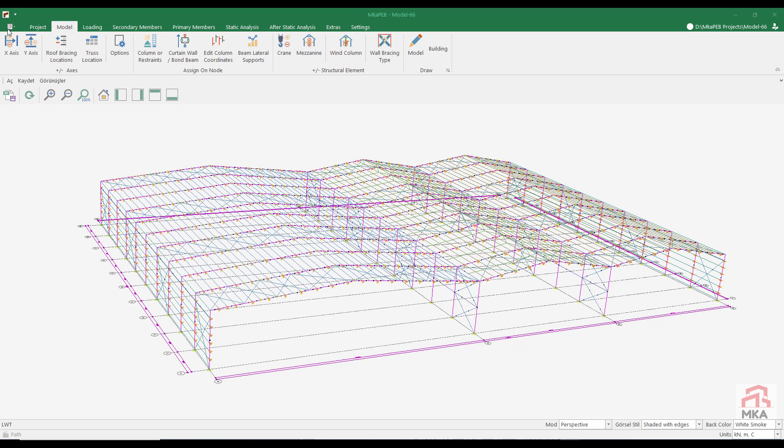So, which standard will we use when solving this project? They said we can use Turkish standards. But this place is actually in Iraq. So we have to use American standards. I will use Saudi Arabian standards in this project because it is the closest place to Iraq. They are neighbors and I will use it to get their earthquake parameters. If you want, let's start the project like this.

We are opening a new project. This will be a PEB type structure, it was intended to be so. Let's keep our truss length of 50 meters, column lengths of 9.5 meters, and 6 meters between axles. Let's remove the column first. Let's fix the features of our truss, 50 meters. I chose this place as 2.5 meters, we were free about it.

I want the distance between the purlins to be around 1.5 meters, so I divided it into 18. With 1.40 intervals. DCY, the initial height of the beam, 1 meter. We make the width of the DCX column in the corner 1.2 meters. DRY is height at ridge, 1 meter.

In the DCX corner, the part where the tapered section will continue along the purlin is exactly 6. I have selected 7 from the DRY corner, and how many purlins from the NDRX ridge will be variable. This is how we arranged our first roof system. I added another one of the same.

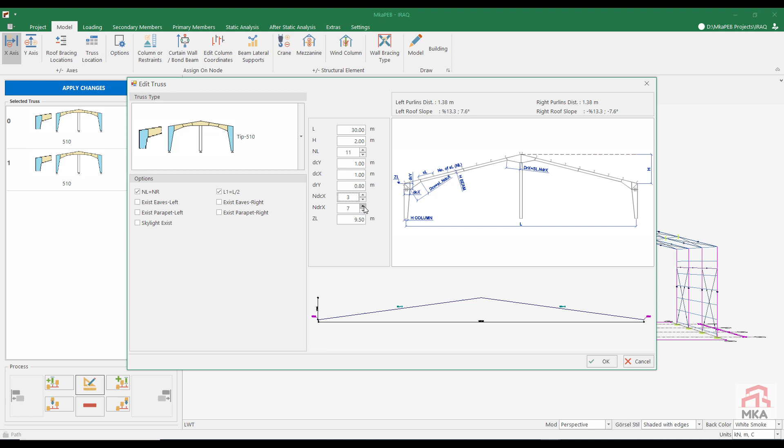Let's edit it now. This time, the span length is 30 meters and the ridge height is 2 meters. I want the distance between purlins to be 1.5 meters again, 11 of them. DCY is the height of the corner tapered beam section. I will not change it. Let DCX stay at 1 meter. I also change the height at the ridge to 0.8 meters. There are 3 reinforced sections in the corner. The reinforced section on the ridge, that's 7.

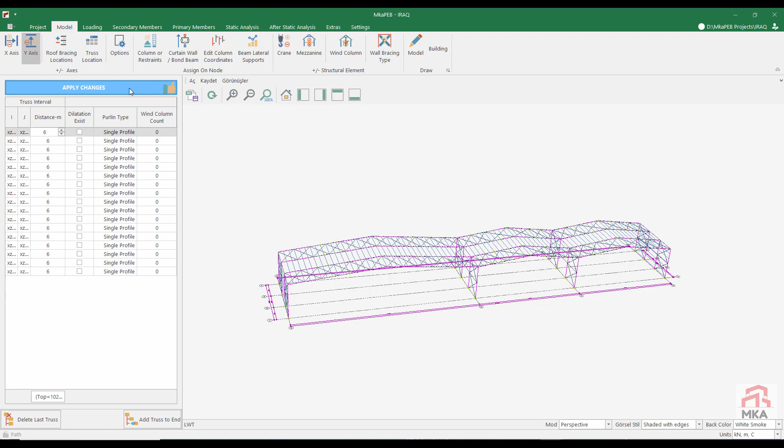Our second truss is here now. Our third truss is the same. We see a structure like this. Now let's enlarge our building. It was supposed to be around 100 meters. I'll make it 102 meters, since it's a multiple of 6. It will be such a huge building.

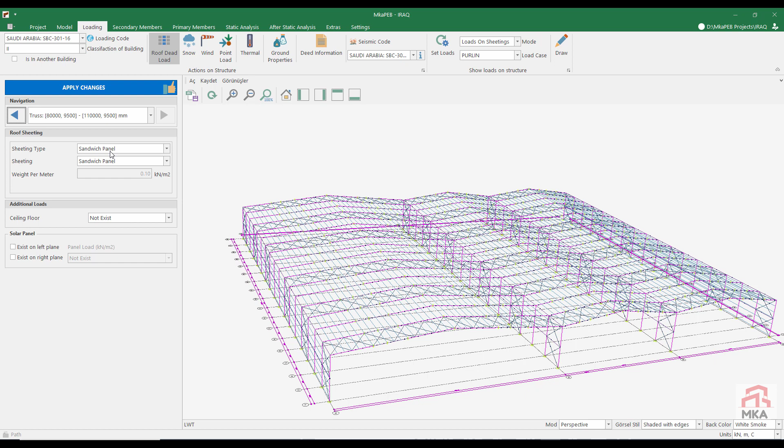Now let's see our loads. We use EN 1991 in Turkey, but since this project is in Iraq, we will use the Saudi Arabian standards, since they are neighbors. Occupancy class is 2. Our roof cladding is sandwich panel. There is no solar panel on it. This is Iraq, so we will take the snow load as low as possible. I'm thinking of a snow load of around 0.2 kilonewtons per square meter like this.

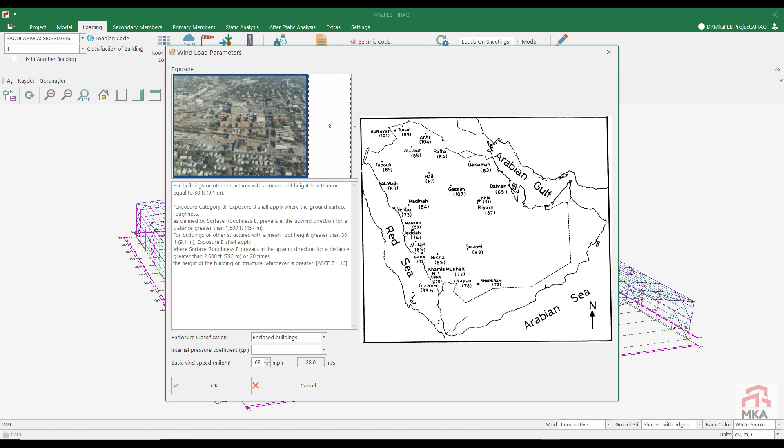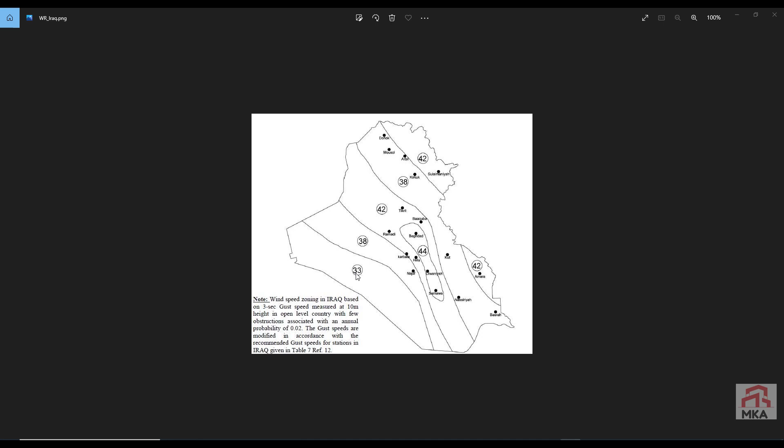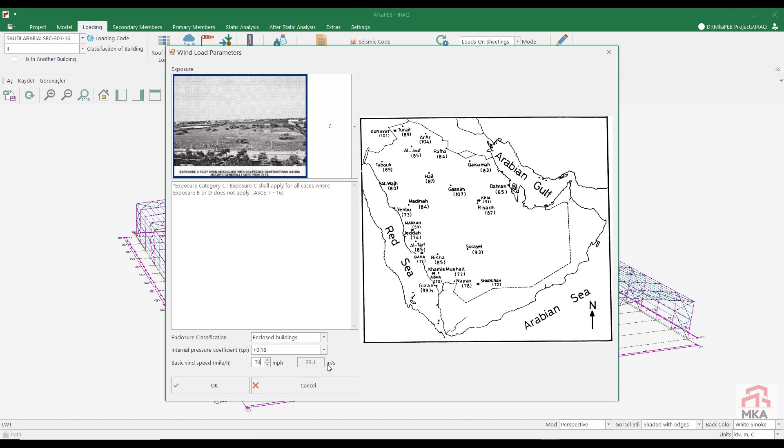In terms of wind load, this place will be in category C as it is more than 9.1 meters. It's a closed building. Internal pressure is 0.18. This is the wind map of Iraq. A wind of around 33 meters per second is mentioned. So we're somewhere in that area. At 74 miles per hour, 33 meters per second is achieved.

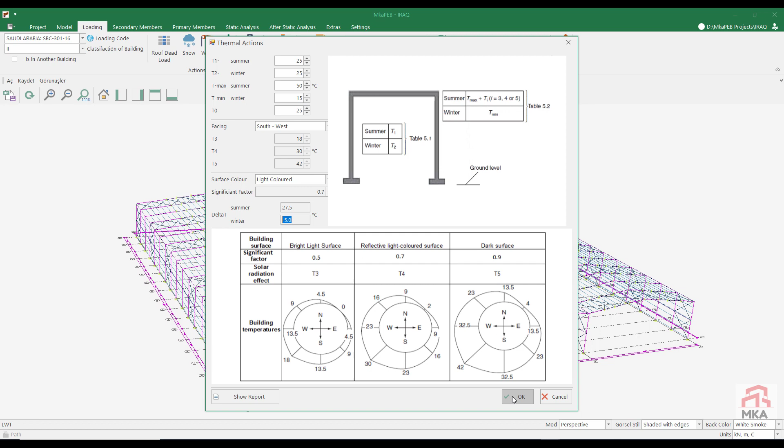Let's come to the information about the earthquake load. This is the Saudi Arabian building code.

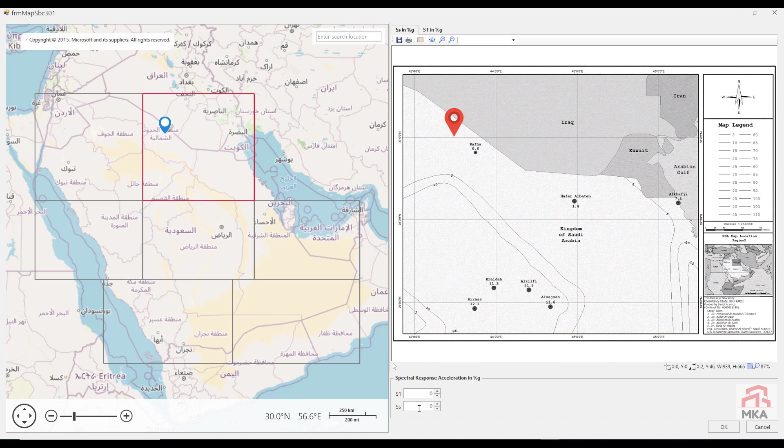Our building is on the Iraq border. Let's use these values. SS value is 0.6. S1 value is 0.2. My soil class is Group D. The building importance factor is 2.

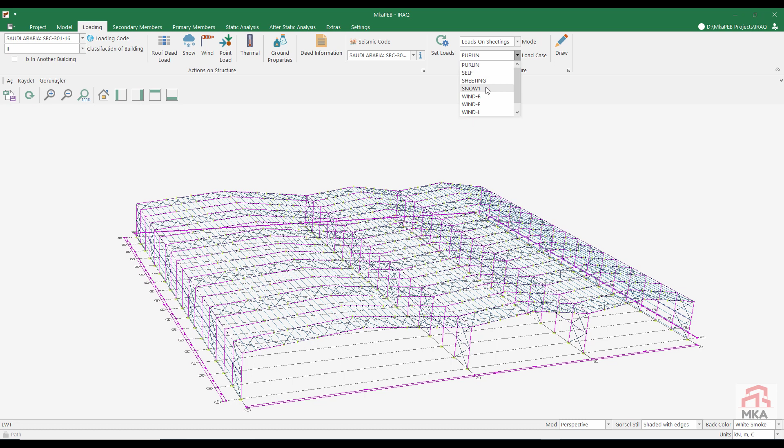According to this information, we can now see the active loads in the building. In the meantime, there will be snow accumulation between those two roofs. Even if our snow loads are low, snow accumulation is taken into account. These are our wind loads. We can see the wind loads coming into each of the roofs.

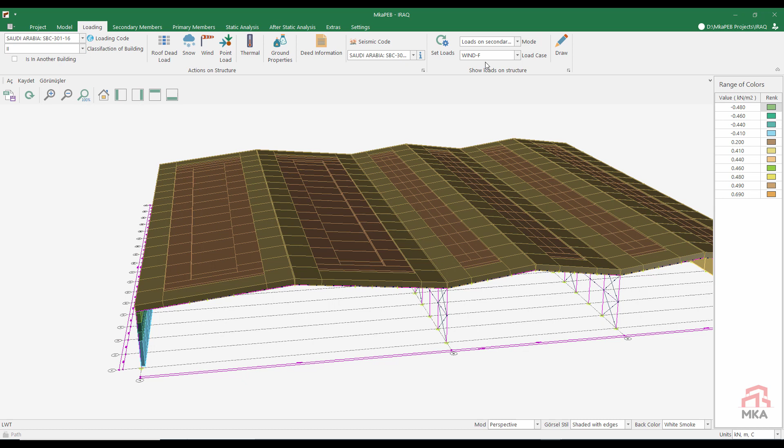The distribution changes when the wind is from the front. We can transfer these to the secondary building elements. We will calculate the roof and wall purlins according to these loads. Then we transfer these loads to the main carrier systems. We will design our columns and beams according to these loads.

Now let's come to roof purlins. In roof purlins, all our purlins are the same. I saw that the C200-15 profiles would be sufficient for purlins. Our second truss is C215. Even if it's at 92% capacity, it's enough.

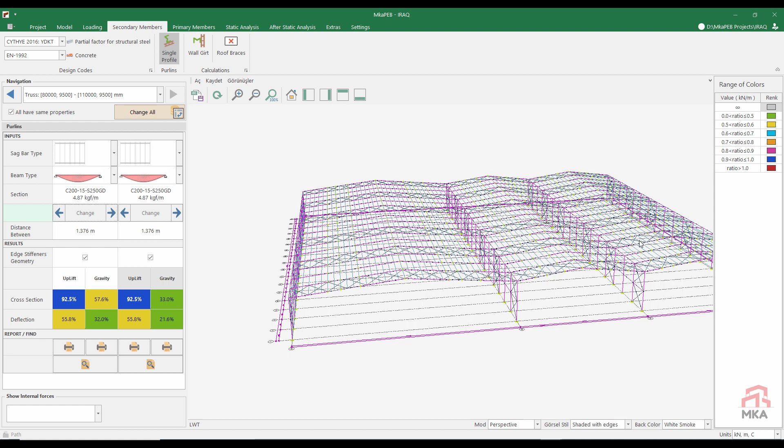The main load here came from the wind. There was snow on vertical loads. Here the wind is stronger. Thus, we have made our roof purlin calculations for all our trusses. Then let's come to the girts. Let our wall girts also remain as C215.

Let's look at the girts on the right side of the building. I changed them to C215 as well. While we're here, let's add lateral supports to the columns in the girts on the right so that we don't do it again and again. Let's do the same with the right side columns. They are okay too.

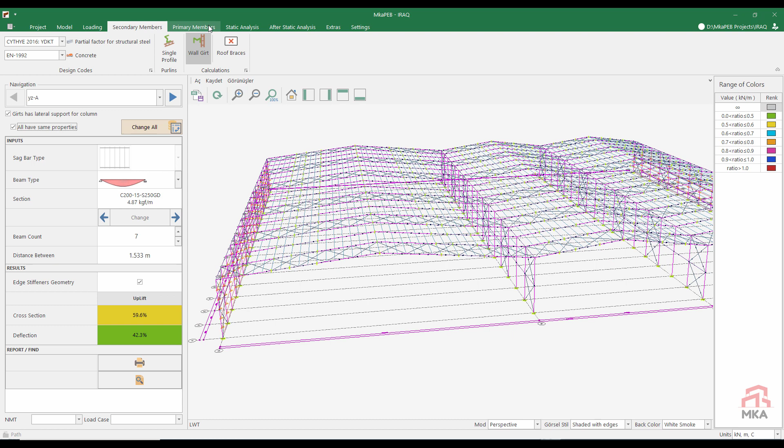Then we can move on to changing our column sections. Main columns. The leftmost column. The facade cladding is sandwich panel. This column is also 200-20. I choose a 600-15, 200-20 column with a height of 600 mm. Let's assign the cross sections of the columns together. There is no cladding on them. Again from the 200-20 series to the 500-12.

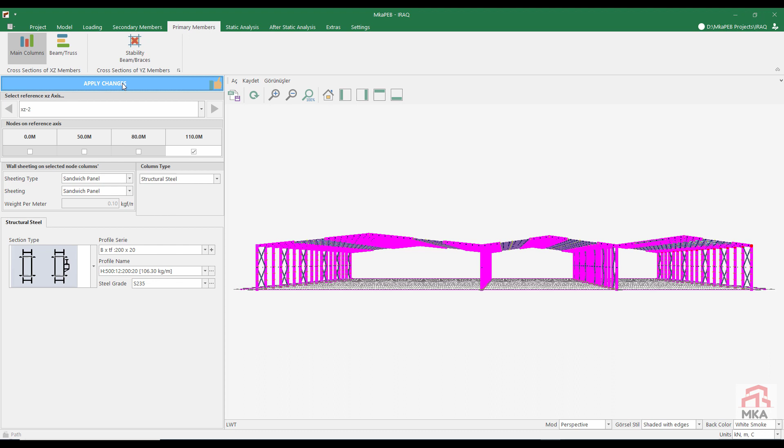Now the far right column. I don't want any type variety in the far right column, so I will use the same profile again. There's facade cladding on this one. Right. 200-20. 500-12. Steel grade is also S235. In this way we have defined column sections.

Now let's come to the rafter cross sections. We will choose our beams from the 175-15 series. The first is 600-12. Then the second truss, in the middle, 458 from the 150-10 series. And the other will be the same. 458.

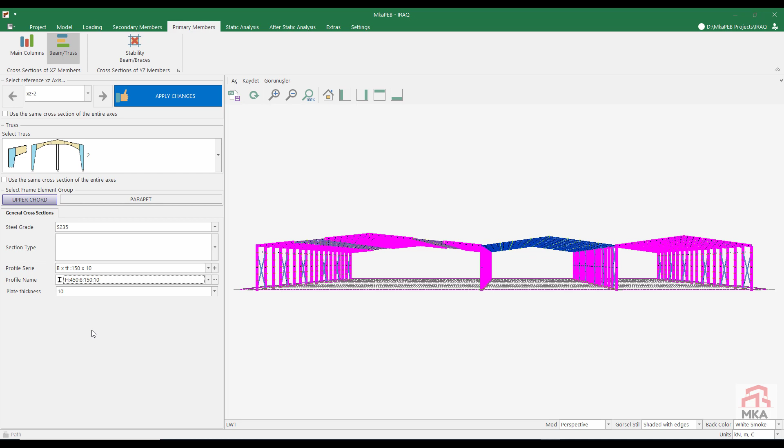Now let's assign lateral supports to our rafters. 25 meters in the middle. We define lateral supports to the 50-meter beam, by skipping from right to left. Then the middle roof system. From the right to the left of 65 meters. Similarly to the rightmost.

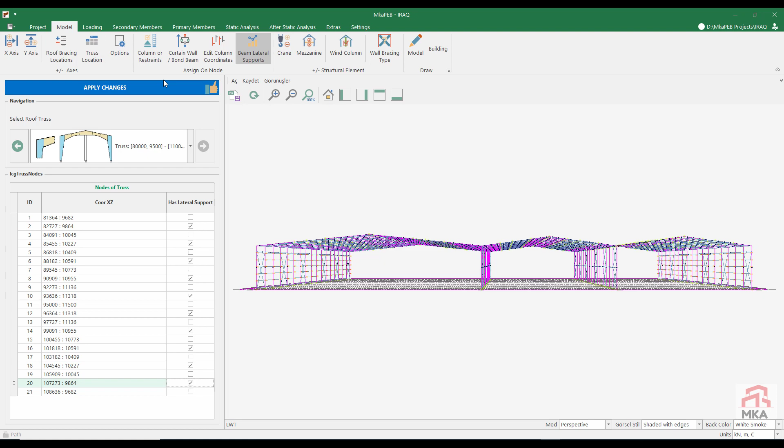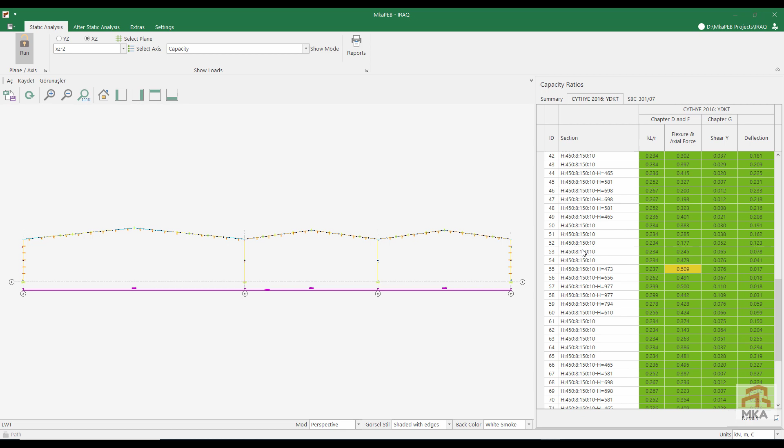Now let's do static analysis. The strength of the rods we used in the braces are not sufficient. On the YZ axis, there are also problems with the middle rod bracings. We'll check these again shortly after we put the wind columns in. If the problem persists, are we going to use tubes? If not, we will use circular hollow section profiles.

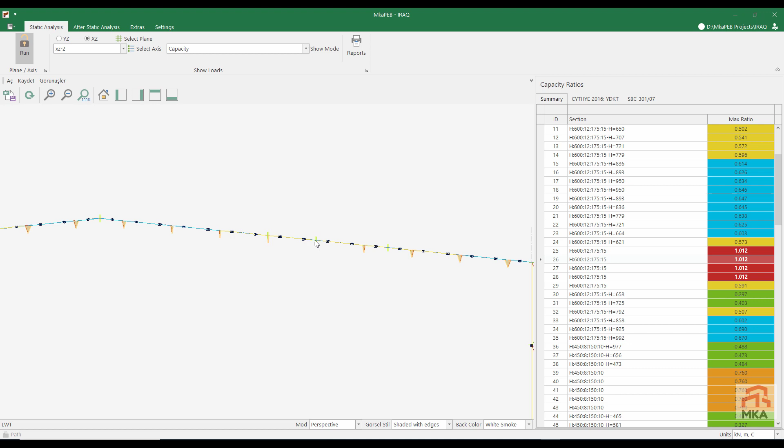It is green when viewed as such. What's not green? There is a lateral buckling problem on the 25, 26, 27 over there. We forgot to put one lateral support in between and the program realized it. The program warned us. We know that sections are not a problem. Let's not look at it again now, as I'll be repeating the analysis in a moment anyway.

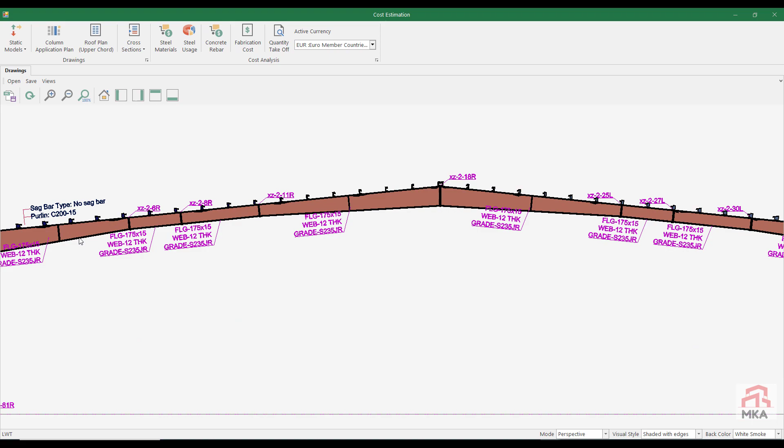How much does our solution cost? Let's look at a cross-section first. Let's check if there is something bothering the eye. It looks pretty good. It doesn't seem like much of a problem as the sections are sufficient. Side columns are connected from the top, and there are side beam connections between them. Considering these connections, I chose the flange thickness of the column sections a little thick.

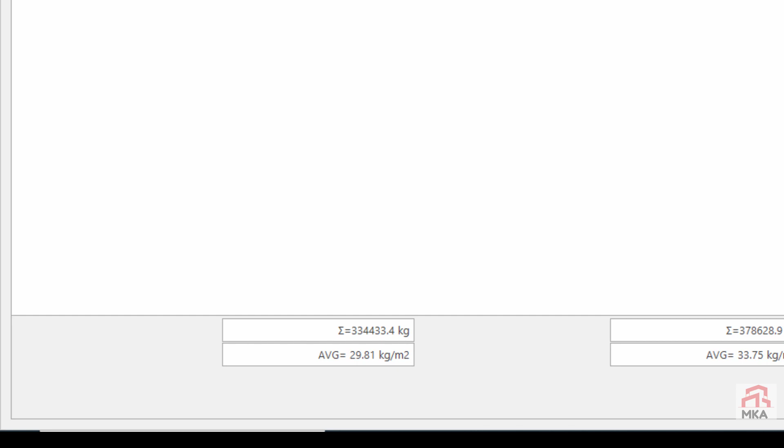Now let's look at the cost. So 30 kilos right now. Now, at this stage, let's check their connection design.

Now let's solve the corner beam column connection. Connection design calculations will be made according to the following load combinations. It's 574%. Why? Because the plate thickness is insufficient. I changed these to 25. Now we examine the connection.

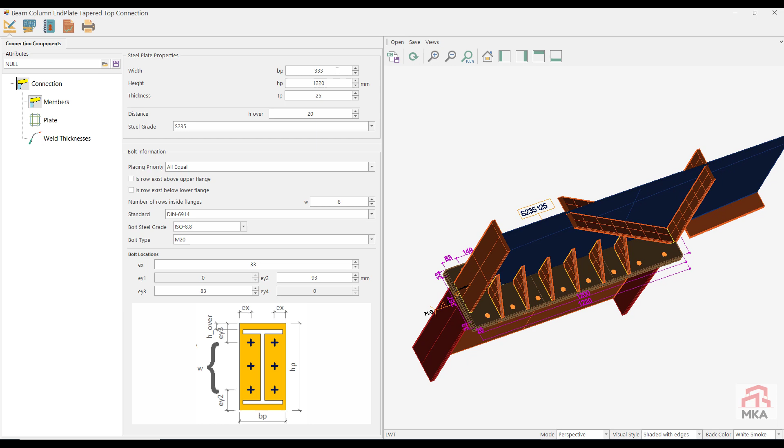I think the end plate is a little wide. It's better now? Let's look at the results. 105. If we also increase the thickness of the bolts, we will see that it is below 90%. This connection is okay.

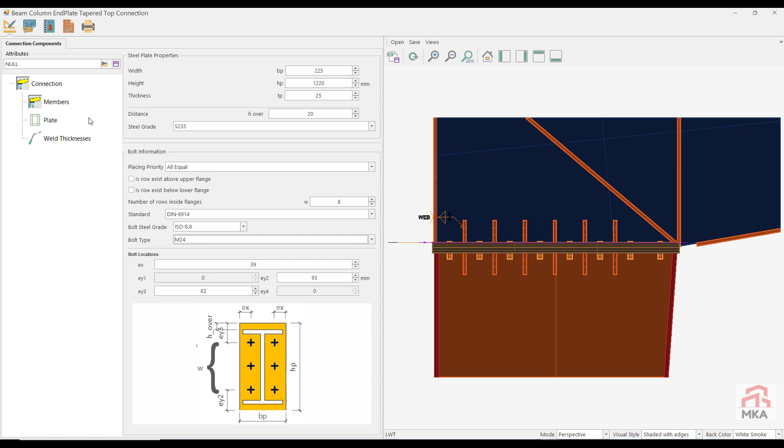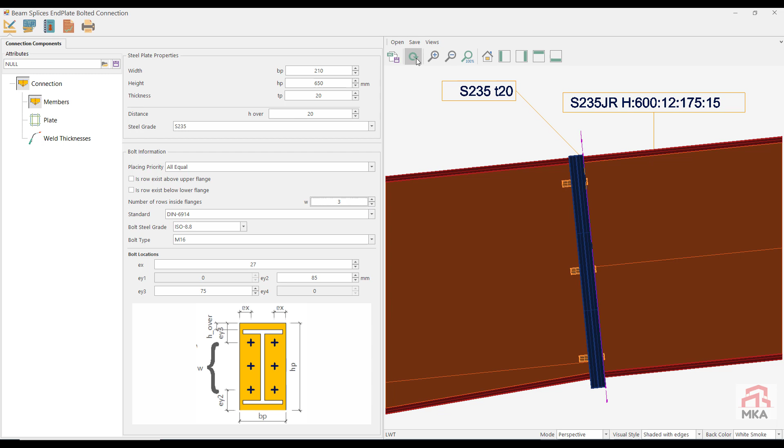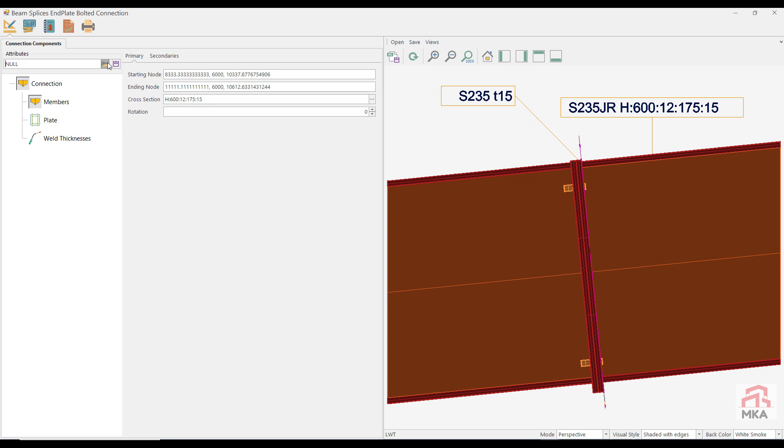Then the middle one is the same. Let's not make different additions in connection attributes. More than enough. Let's increase the number of bolts here. 5 bolt rows. It's better now?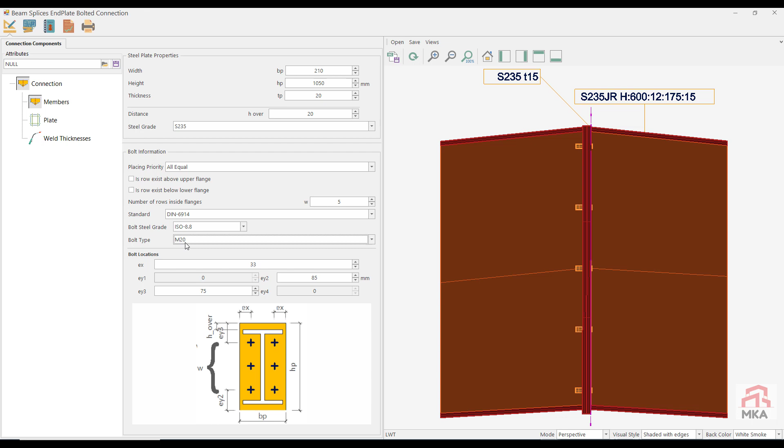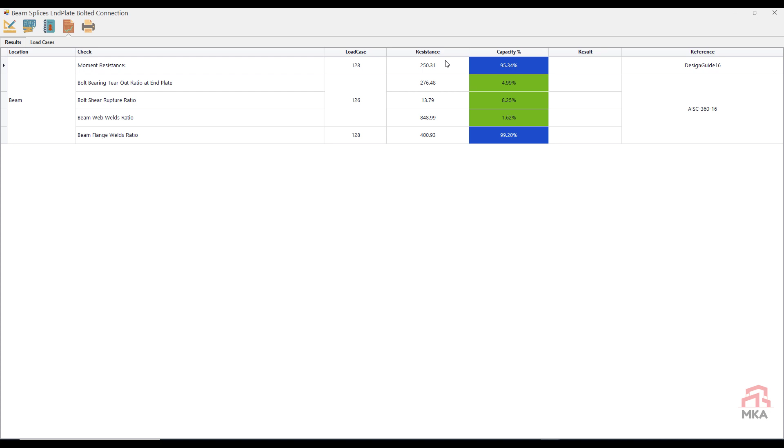Let's increase the plate thickness and the bolt diameters. Welds remained very limited. Let's increase the thickness of the welds a little. Better now. This is similar to the previous beam splice connection. Let's change the weld thicknesses.

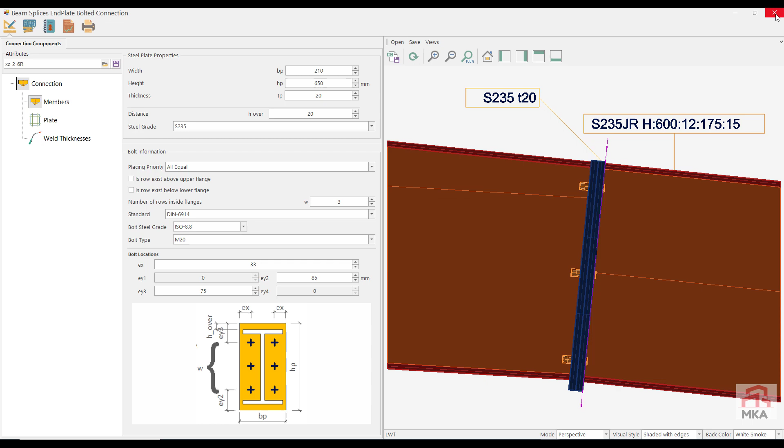Let's use M20 bolts and it's now okay. I saved this too. I checked connection design results. It's more than enough.

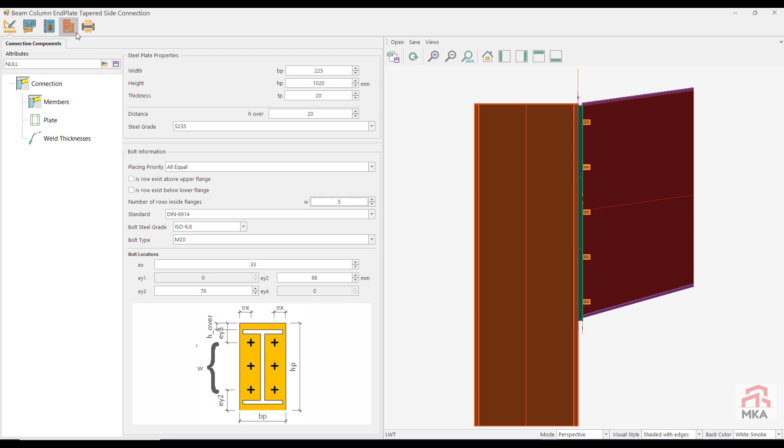Now we come to the side-connected column beam connection. End plate thickness is 20, width is 225 mm. Let's reduce the number of bolts. The distance between the bolts should not exceed 20 centimeters. In order not to take much of your time, similar connection design calculations have been prepared by speeding up.

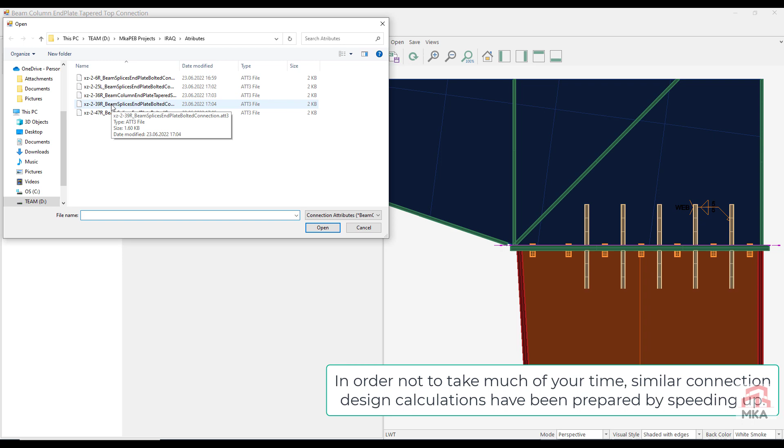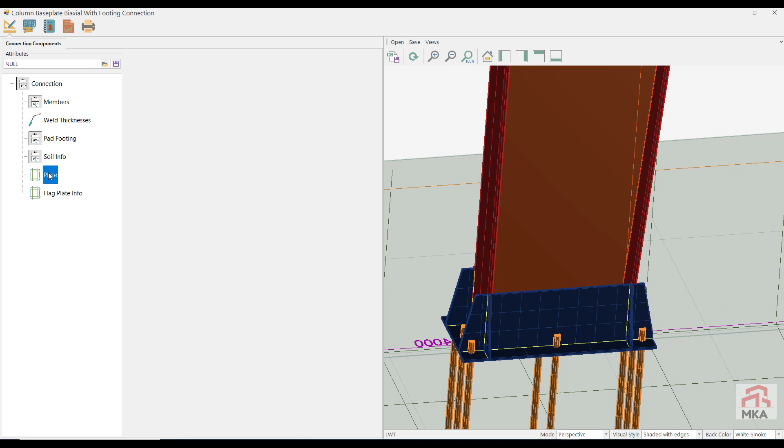Now we come to the column base plate connection design. The pad foundation will also be calculated. Our column base plate is quite small compared to our column, 500 to 900. For this project, 30 mm. Such a column base plate as you can see. Let's look at the results. The thickness of the column base plate is insufficient. 40 mm thickness is enough.

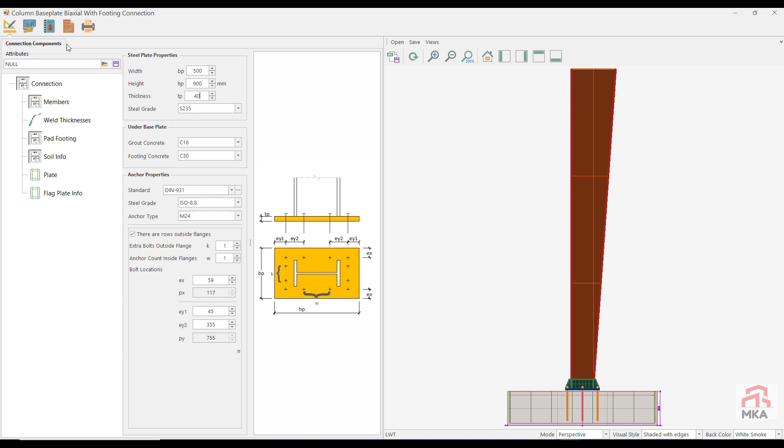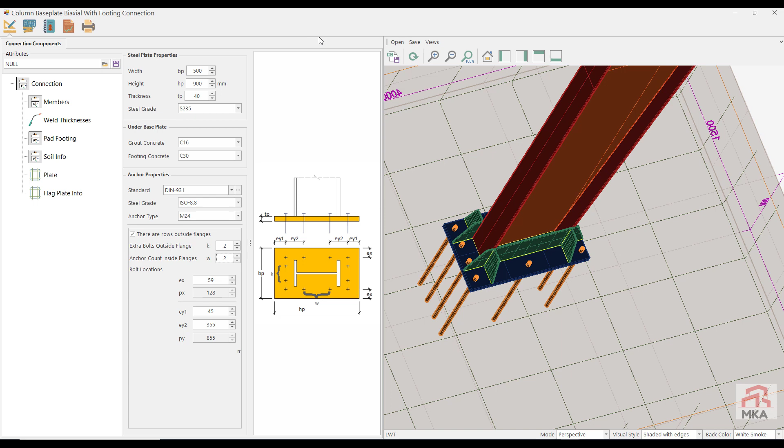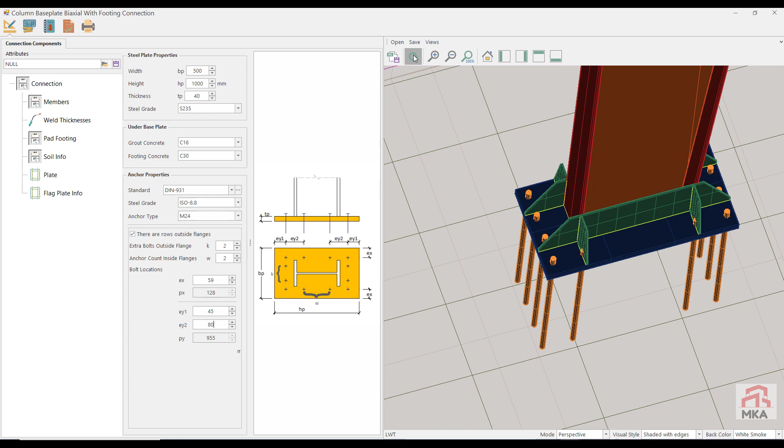Let's increase the number of bolts in the flange by 1. The distances between the bolts on the body are too far, let's fix them. Let's enlarge the plate and bring the bolts in the flange closer together. The flange requires 2 rows of bolts, not 1. Now the results are enough.

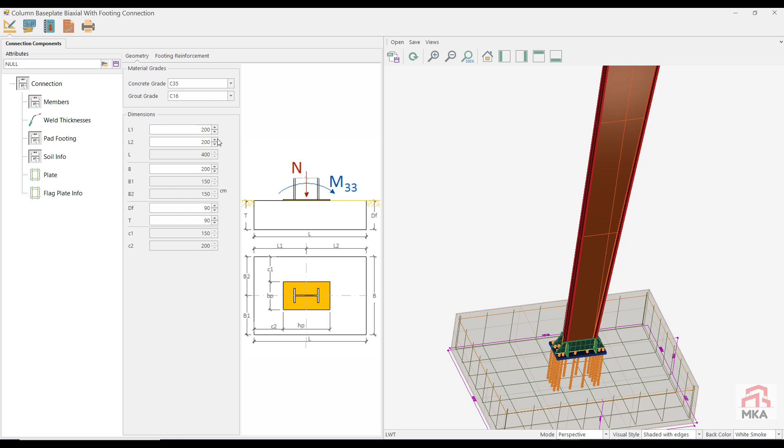There is a problem with the pad foundation dimensions. Let's see if we can shrink the pad foundation dimensions a little more. The foundation used here is 4 meters by 3 meters. Let's make it 4 by 2. Now let's fix the reinforcements of the foundations.

Let's set rebar diameter as 24 millimeters. They are 14 centimeters apart. Again, I make sure that it is under 20 centimeters. We can reduce the numbers a little. Let's reduce the diameter.

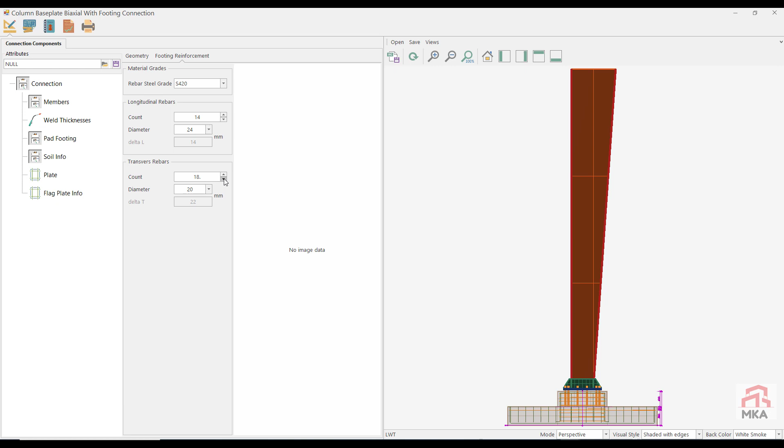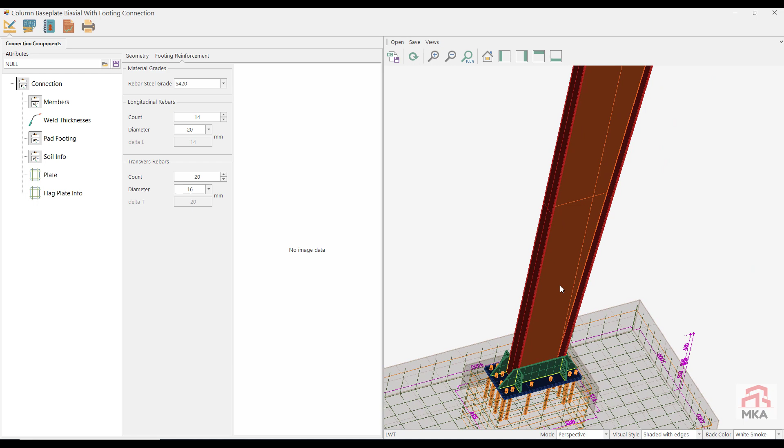There is a connection like this with 97% capacity. It is a bit unusual, but since the building is also unusual, this is only possible with such a column base plate. If we had made the base plate connection of the column with the foundation as a simple support here, maybe our column base plate would not have been this big and our pad foundations would have been smaller. But this time our column and rafter sections could have grown. I haven't tried it yet.

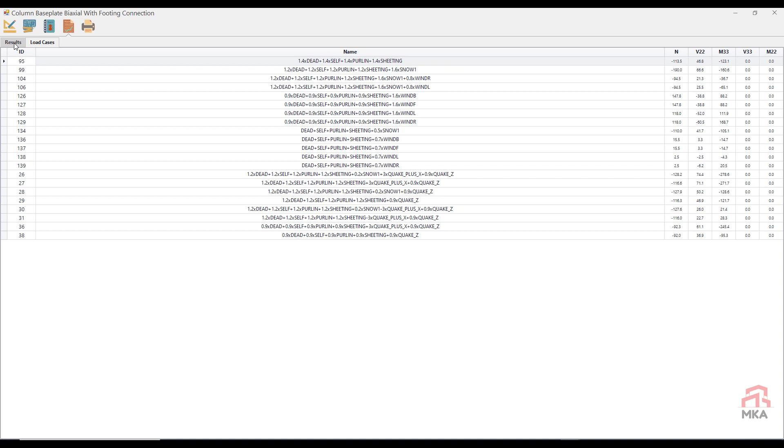Now let's look at the pad foundations of the middle columns. The foundations of the middle columns may be relatively small. When we look at the results, we see that there is a problem in the plate thicknesses. Let's use 500 to 800, 30 millimeters, M24 anchor rods. Column base plate thickness is 40 millimeters.

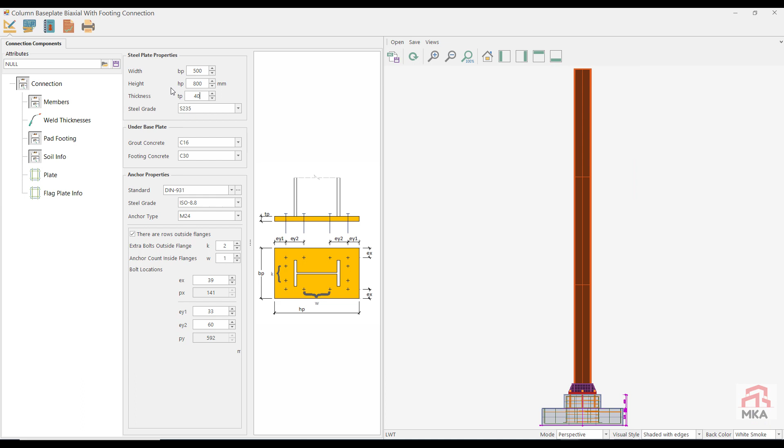It's enough now. We can reduce the dimensions of the foundation by looking at the soil bearing capacity. Let's change our foundation dimensions and try 240 to 150. I think this way is enough. Let's check out our foundation reinforcements. 20 mm diameter reinforcements. Just like this is enough.

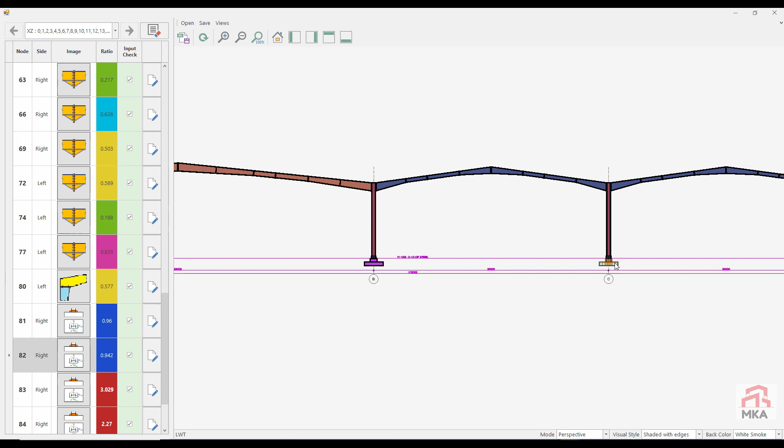We had a small foundation for this column. Let's use the same values of the previous foundation. Let's look at the results. Sufficient. I don't want any variety. Soil bearing capacity is insufficient. So we are increasing our pad foundation dimensions.

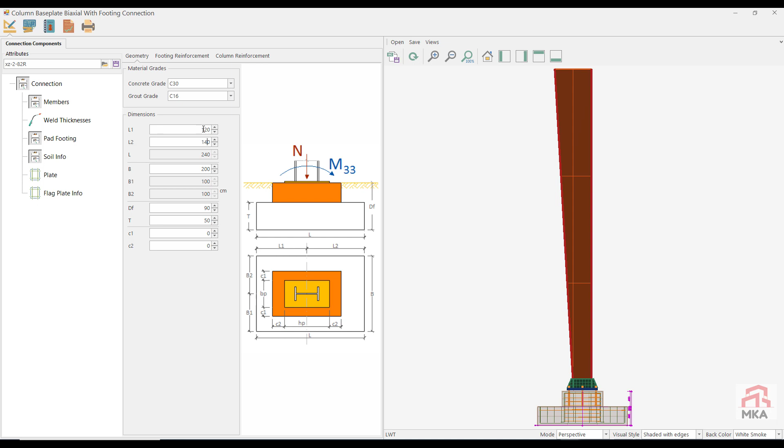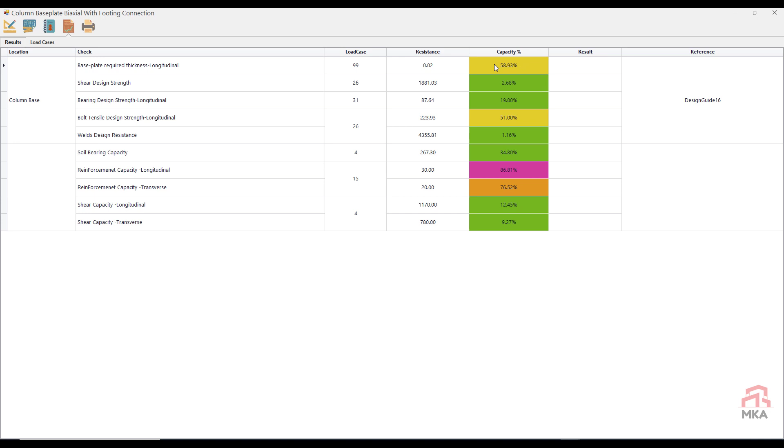Longitudinal reinforcements are insufficient or at limits. Let's increase them one by one. Much better this way. The plate thickness can be reduced, but I won't change it for variety. In this way, we have completed the connection calculations.

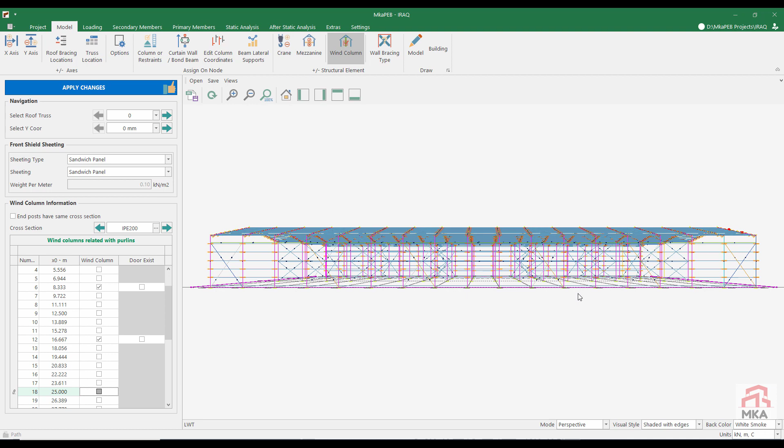Let's complete our missing calculations. One of them is that we didn't put the lateral support over there. Let's put it first. Now we will add end posts to complete our project. We chose wind columns and chose sandwich panel for shield cladding. Numbered 6, 12, 18, 24, and 30.

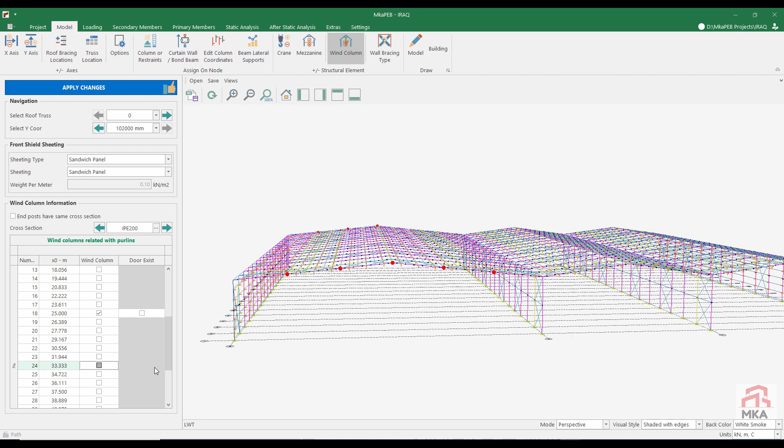The back of the building. Sandwich panel cladding again. 6, 12, 18, 24 and 30 meters. Then the ones on the side. 4 and 4th from the end: 4, 9, 13, 18. Same on the other side. The rear is 4, 9, 13 and 18. In this way, we have indicated the locations of our wind columns.

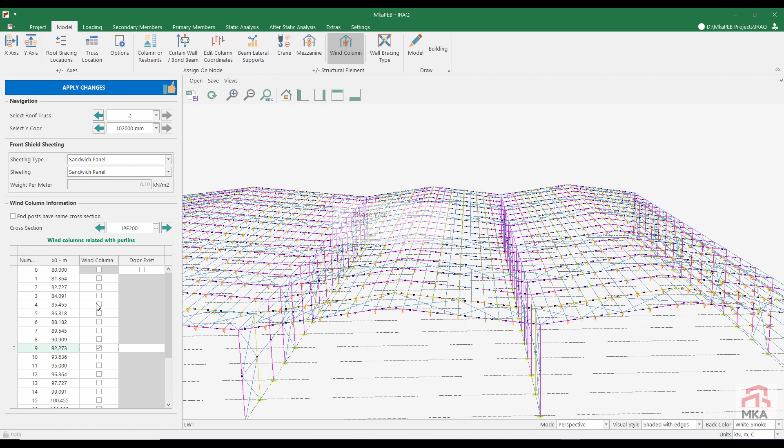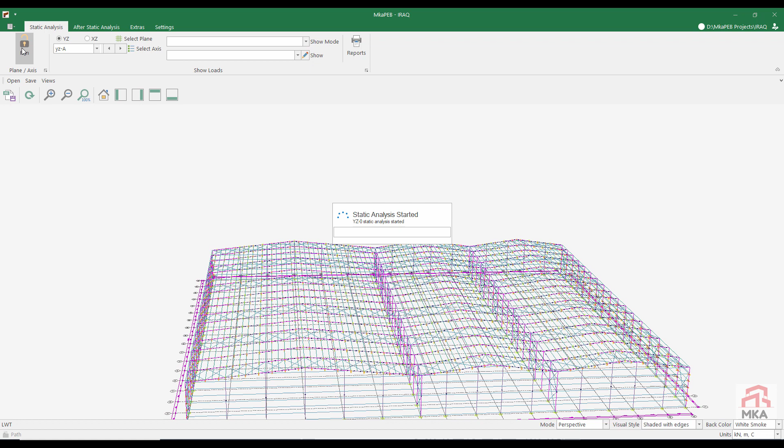And now we must assign the end post cross sections. Let's assign them. The same sections will be used in all wind columns. All my end post cross sections are H600:12 to 175 to 15. Now we repeat the static analysis. After the wind columns come, we will make the calculation of the roof braces and the wall bracings.

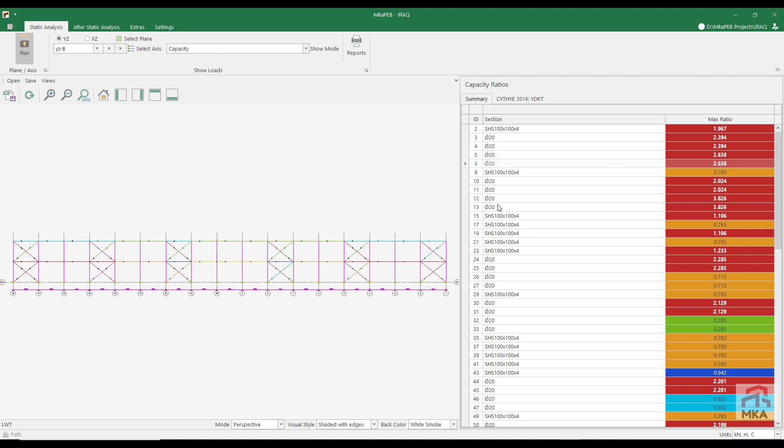Because the sections of these elements need to change according to the wind coming from the front shield, our side bracings were not enough as we expected. We can use CHS profiles or large rods on this axis. But I will prefer to use a CHS profile on this axis. Likewise, on the right axis, instead of the 20 rod.

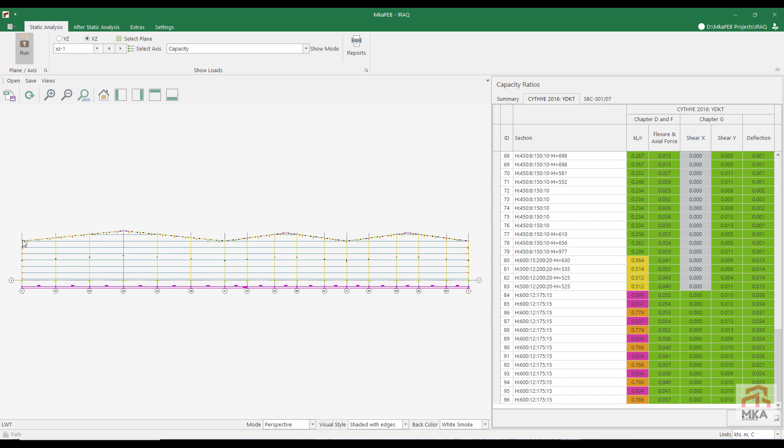Now let's check the sections of the front shield end posts. We have chosen our end post cross sections a little larger. Thinner profiles could have been used. It was also possible for us to reduce the section of that rafter on the front shield.

Let's fix the sections of the rods and braces on the YZ axis. We will use 30s rods, not 20s. We're also going to make the stability beams a little larger. I'm changing the braces here to D30. I also changed the stability beam to SHS126.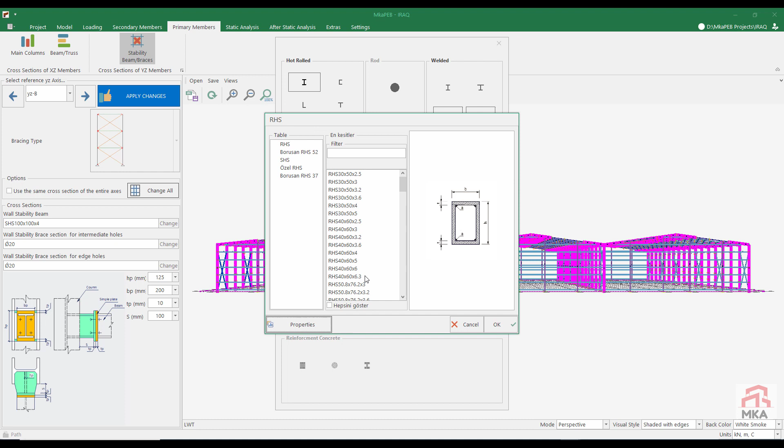Those on the middle axis will be slightly larger. This time I want to use CHS profiles, 89 to 6 mm. We also enlarge the stability beams and make them SHS150 to 6 mm. In the YZ axis, we make SHS150 to 6 mm, as in the YZB axis.

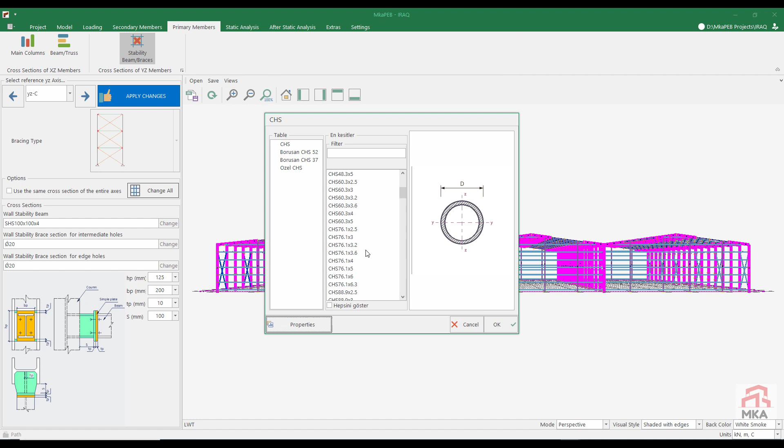We also change the stability brace to CHS 89 to 6 mm. I will also change YZD axis bracing elements like the YZ axis. We repeat the static analysis. In YZ axis, wall bracing elements capacity ratios are in acceptable limits. In YZB axis, 89 to 6 CHS profiles are insufficient.

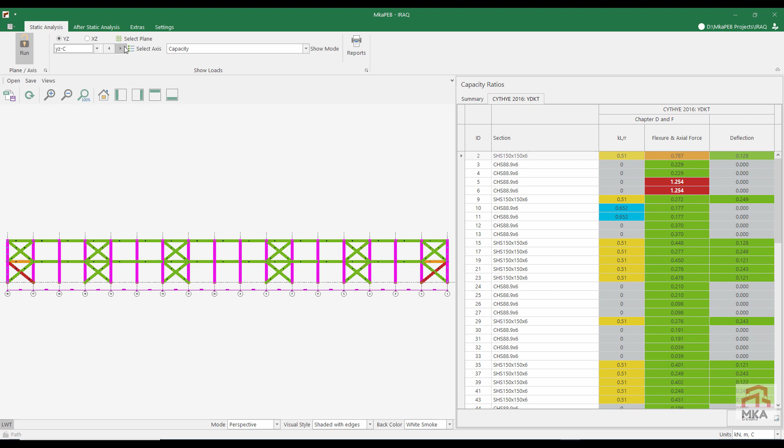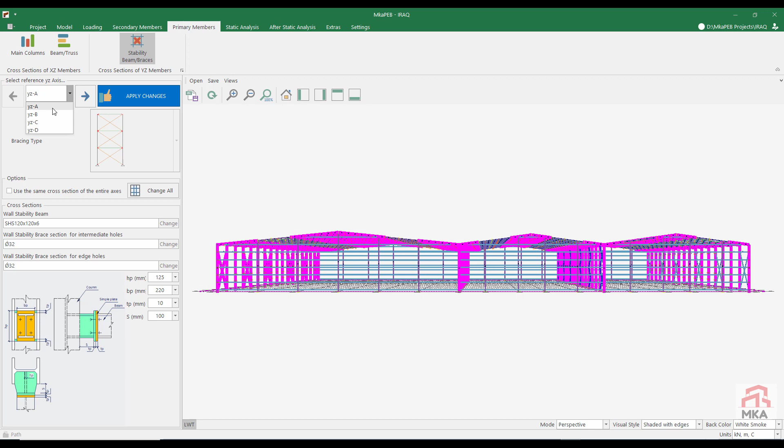We can also change the first and last ones. YZC axis, first and last row bracings have the same problem. Let's show you how to swap first and last row bracing cross sections. In YZB and C axis we try to use CHS 114/6 instead of CHS 89/6. In YZA and D axis, I want to try D32 instead of D20.

After this stage, we will do the static analysis and we will finish our project by looking at the total cost of the building. The results are slightly better. Let's look at the intermediate axes. It was almost okay. We could have chosen a little larger than this. So we had to choose a thicker one. There is no problem with YZD.

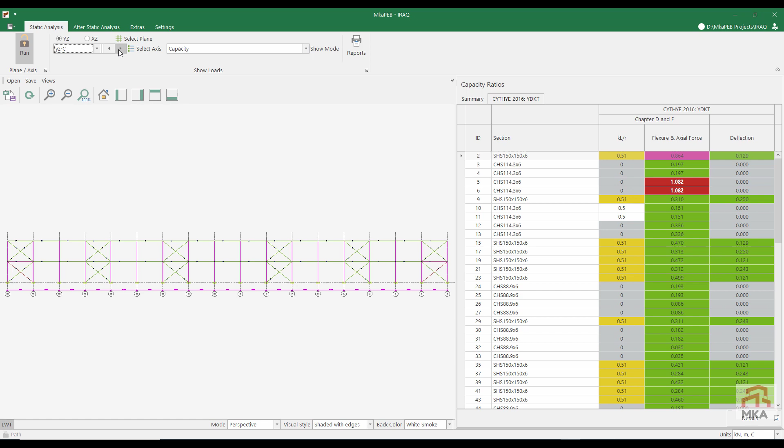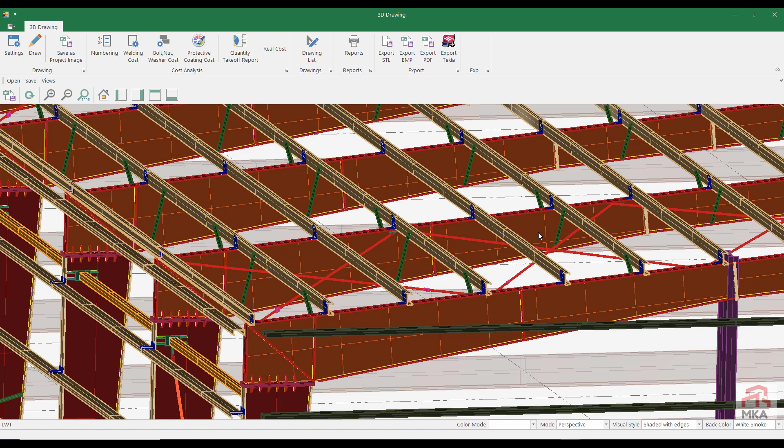Let's see the 3D model of our structure as it is. And here is our model. Let's take a look at what we're doing now. You can see our lateral supports in the rafters. These are necessary to prevent lateral torsional buckling. Our connection details have arrived. We have lateral supports in the columns.

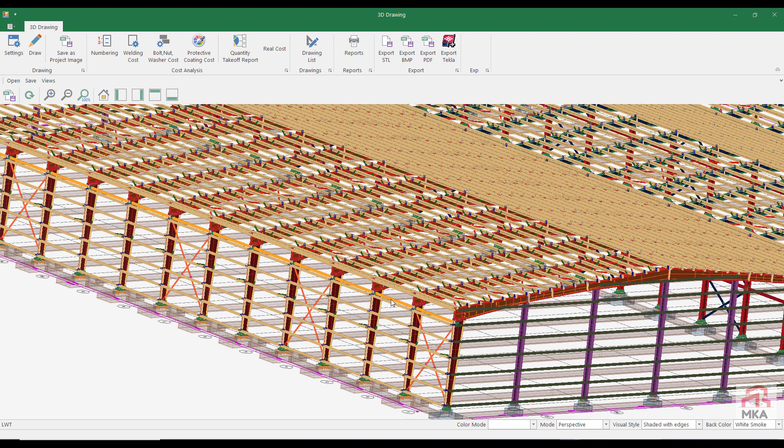We also have lateral supports on the side columns. Our wall purlins on the front gable facade are there. It actually looks like a pretty big building. The connections of our rods and the supporting structures of the purlins can be seen.

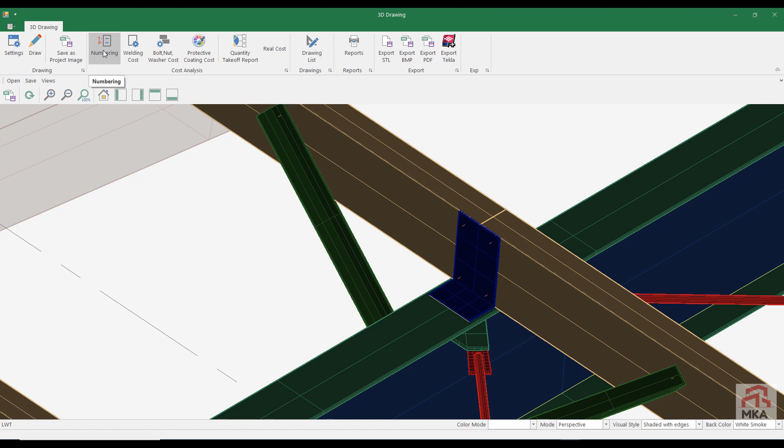Whilst we're at this stage, let's get the actual cost of our build. The actual cost of this building is 36.33 kilograms per square meter with the wind columns and the purlins on the gable facade. As Tolga said at the beginning of this video, this building was solved with a local software in Turkey and weighed 80 kilos per square meter.